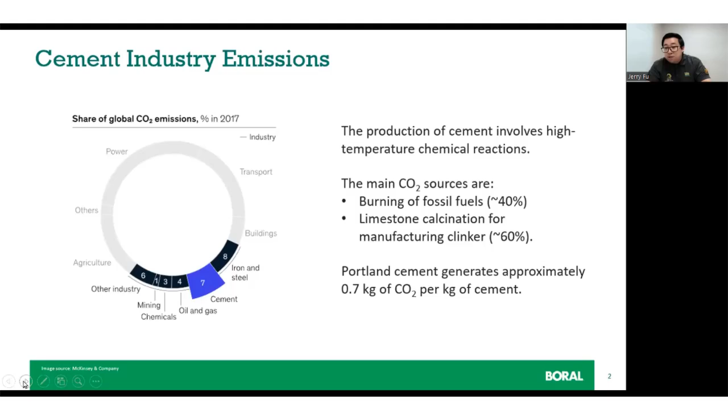Many of us have already heard that cement production is responsible for about 7% of global anthropogenic carbon emissions. More than half of these emissions are due to the release of CO2 upon the thermal decomposition of the raw material we use, limestone, during cement manufacturing. This chemical decomposition process contributes to about 60% of the total carbon emissions of the cement manufacturing process. At the same time, the fossil fuel used during manufacturing accounts for the other 40%. For every ton of manufactured grey cement, about 700 to 800 kilos of CO2 will be released.

As long as we don't change the raw material we use to make our grey cement, CO2 emissions will be unavoidable. To manufacture cement, the powder raw material is fed into the preheater tower and then the calciner. It gets heated and the calcium carbonate, the limestone in the raw material, undergoes a calcination process. The preheater consists of a series of cyclones through which the raw material is heated with hot flue gas, and the calcination of limestone takes place at around 900 degrees.

The chemical process can be described as calcium carbonate transforming into calcium oxide and CO2 gas. A portion of that calcium oxide will react with silicate materials in the calciner, especially when the raw material particle contains both lime and silicates in direct contact, resulting in the formation of belite and some aluminate and ferrite phases. The unreacted calcium oxide is denoted as free lime.

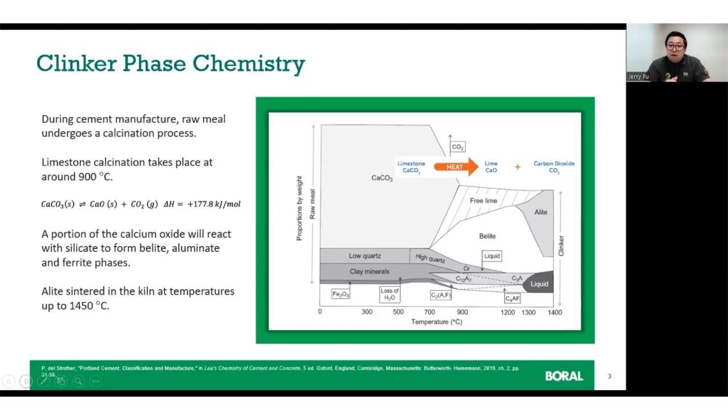The calcined raw material then enters the rotary kiln, where the main clinker phase, alite, is sintered at a temperature of 1450 degrees Celsius. This is why the manufacturing of clinker is so carbon and energy intensive.

So we need a greener way of making and using cement in this era. The industry aims to strive towards a net zero carbon emission target by the year 2050, even as industrial demand is growing and we have energy prices soaring as in today's market. For the past decades, a lot of effort has been put into developing new binders to substitute Portland cement, creating low carbon blended cement systems. Further research has been done, and continues, to investigate and develop new technologies to help mitigate operational and manufacturing carbon emissions. Technology including new approaches to limestone calcination, burning waste products to power the calciner, and pumping CO2 deep underground for permanent storage.

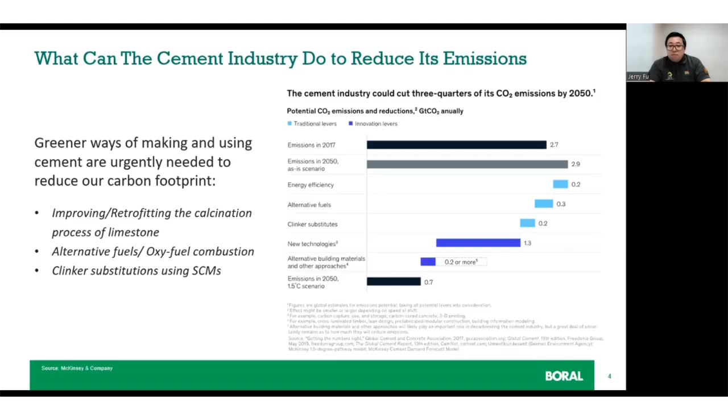Even though everyone is working incredibly hard to minimize our carbon emissions as much as possible, a considerable portion of CO2 emission generated in cement manufacturing is unavoidable. It cannot be tackled using established techniques such as alternate fuel or clinker substitution. So we must continue to develop new technology that prevents CO2 from reaching the atmosphere on a large scale by investing in long-term storage solutions in the realm of carbon capture technologies.

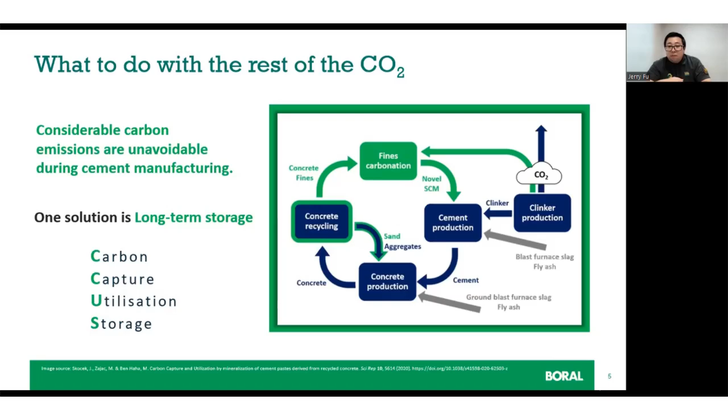One way to store CO2 in our concrete material is a process called carbonation. Recycled concrete contains alkaline minerals in the attached mortar that is ideal for carbonation, and then used as upcycled aggregates in concrete, preserving our natural resources. This process works by having cement hydrated products gradually reabsorb CO2 from the atmosphere through a physiochemical process called carbonation.

During carbonation, CO2 diffuses into the pores of cement-based materials and reacts with hydrate products such as Portlandite and CSH in the presence of an acidified pore solution. Carbonation starts at the surface of the concrete or mortar and slowly moves towards the core of the material. This process is also influenced by a range of different factors such as CO2 concentration, hydration product compositions, and exposure time. This process is a natural process.

So carbonation is a natural process, but the problem is it's a very slow occurring process. It's been reported that up to 20% of our CO2 emissions from the clinker manufacturing process can be reabsorbed by the concrete structure over its service life.

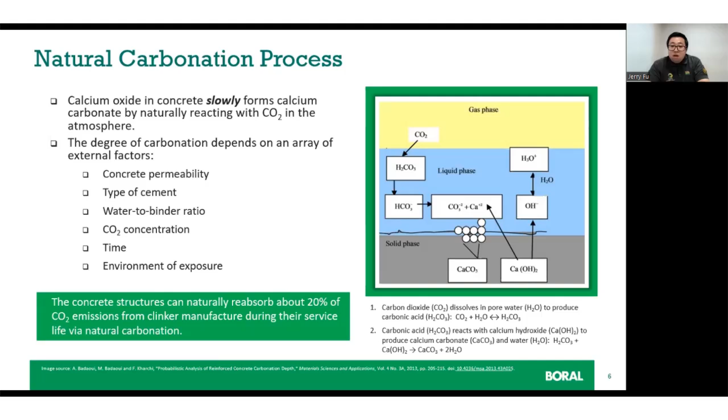There is an extensive need for aggregates in the production of concrete and other construction material due to the large number of construction projects occurring worldwide and also here in Australia. Therefore, there is a business case for encouraging recycled facilities as well as construction material manufacturers like Boral to source a part of our need for aggregates from recycled materials.

According to the 2020 National Waste Report, Australia produced about 27 megaton of C&D waste, which is about 36% of the total waste we produce. 23% of the waste was disposed either as landfill or destroyed. 76% was recycled and 0.7% was recovered for energy at the landfills.

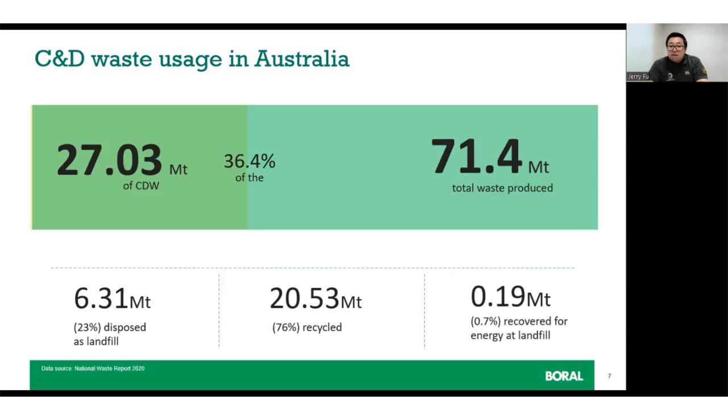Usually after demolition of old roads and buildings, the removed concrete is often considered worthless and disposed of as demolition waste. By collecting the used concrete and breaking it up, recycled concrete aggregates are created.

Recycled material used to produce construction aggregates for concrete comes from two primary sources. The first is road construction and maintenance debris, and the second is structural construction and demolition debris. For example, we're talking about demolished buildings, bridges, and sometimes roads.

Most of these recycled materials go through the process of recovery. That's your demolition, breakage, and collecting. It gets transported to a local collection point, then it gets processed. That process entails crushing, screening, separating, and stockpiling before it gets marketed as sized products for multiple uses.

The construction demolition waste could contain wood, plastic, gypsum, metal, glass, and paper, which can be removed at the plant. Other materials that can be present may be mortar paste, bitumen, bricks, tiles, and rubber. So the C&D waste is crushed and sieved into different size fractions.

The recycled aggregates produced at recycling plants may contain 65 to 70% coarse and fine aggregates, while the other 30 to 35% will be adhered old residual cement paste. The amount of cement or mortar paste is reduced as the number of crushers increases, but this usually incurs more production cost.

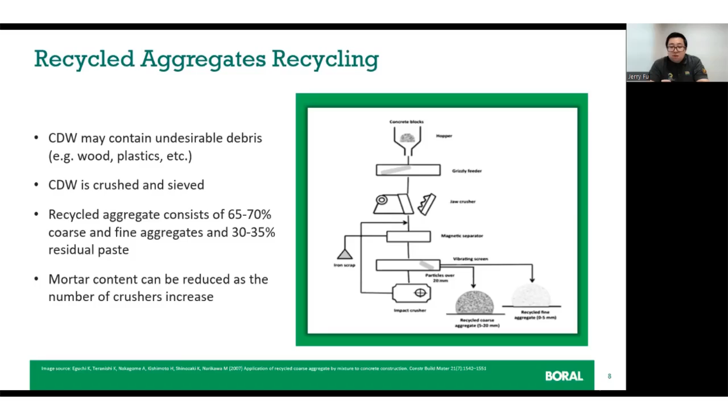Unfortunately, we can't just simply swap out the natural aggregates for recycled concrete aggregates. There are some significant differences and drawbacks regarding recycled concrete aggregates. After crushing the recycled concrete down to different aggregate sizes, the process can introduce microcracks within the residual mortar and weaken the bond between the original aggregate and the old mortar.

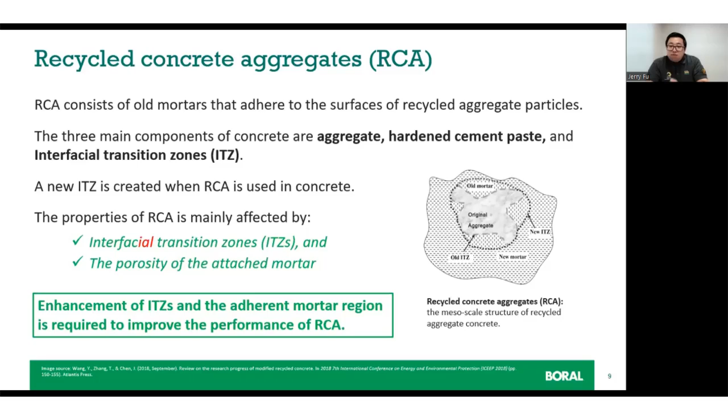The aggregate cement interfacial zone consists mainly of loose and porous hydrates. Since the difference in properties of recycled aggregates with respect to natural aggregate is mainly driven by the presence of the old attached mortar on the surface of the recycled particle, the residual mortar is responsible for the lower specific gravity, high absorption, and low abrasion resistance of these recycled aggregates when compared to natural aggregates.

These residual adhered mortar on aggregate is a main factor affecting properties such as density, porosity, and water absorption of recycled aggregates. The density of these recycled aggregates is generally lower than natural aggregates. This is due to the adhered mortar that is less dense than the underlying natural aggregate. The variation in density can depend on the specific aggregate in question.

The adhered mortar can be lightweight compared to aggregates of the same volume, which causes a decrease in product density. The residual mortar on the recycled aggregate has greater porosity. This allows the aggregate to hold more water in its pores than natural aggregate. The lower density and high porosity can lead to a reduction in the durability of the final concrete product.

Literature suggests that construction demolition waste aggregate contains about 0.1 to 0.3% higher chlorides and sulfate than natural aggregates, while recycled aggregates have higher abrasion. However, on average, they are still suitable for both concrete use and roads.

Another thing literature has suggested is that recycled aggregates have approximately 50% lower crushing values when compared to the natural aggregates we've been using. But all the literature has suggested that recycled aggregates are suitable to be used as non-structural aggregate, or suitable for minor structural elements.

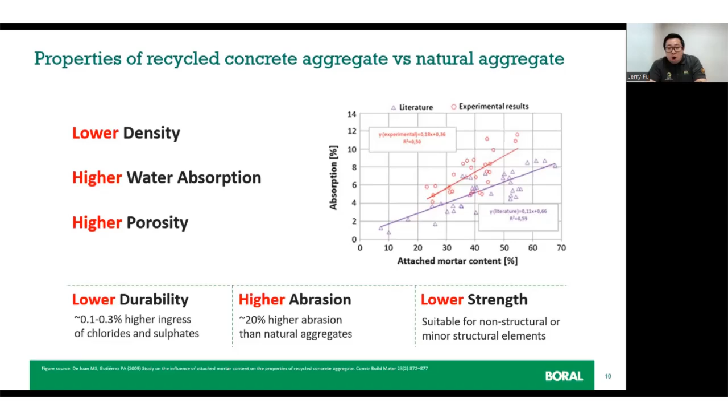Since the surface of the recycled aggregate has a large amount of aged cement slurry attached, this will increase the number of pores and cracks, resulting in lower workability and lower mechanical properties of the recycled concrete compared with natural concrete. So, for example, the higher water absorption of aggregates leads to reduced workability of concrete, thus making concrete difficult to be pumped.

Compressive strength decreases as the content of recyclable aggregates increases. This is for both coarse and fine aggregates. Therefore, a good mix design and preparation of these aggregates needs to be maintained to produce high quality concrete.

As we have mentioned, recycled aggregates have lower density and high porosity. These can lead to faster ion ingression. The high porosity of both the fine and coarse recycled aggregates allows gases to permeate more easily through the concrete internal matrix. So I'm going to skip the rest of these issues listed on the slides due to the time limit.

Given the subpar performance of recycled concrete aggregates, this partially depends on the historical usage and the way it was reclaimed.

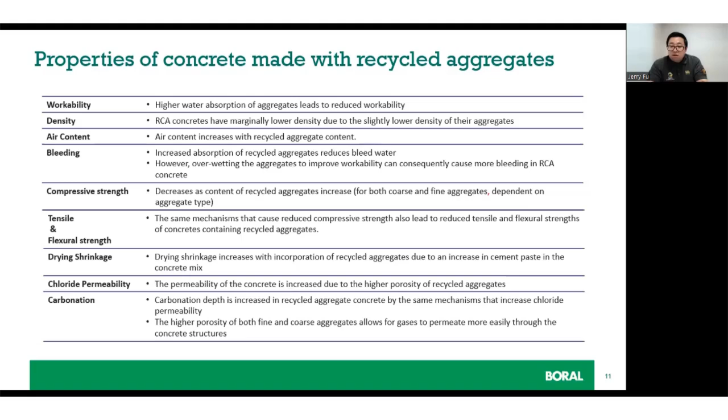Similarly, the required specifications for employing recycled aggregates are also outlined in different standards, such as the American ASTM and British BS EN standards. At the end of the day, these documents are here to provide a more comprehensive understanding of these types of waste and byproduct materials in construction applications, and provide general guidance on engineering evaluation, along with environmental issues and economic considerations.

These documents also consolidate the available materials for technical consideration and provide product specification information and tools for conventional designs.

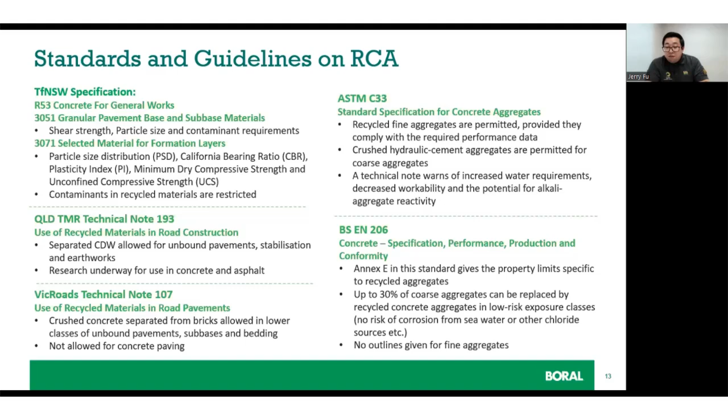So despite the performance limitations of recycled concrete aggregates, the material has been used in various construction projects worldwide in countries across Asia and Europe. Projects range from residential buildings to industrial buildings. It is nice to see recycled aggregates not used just as road base material in projects. So we know it is a viable source of construction material.

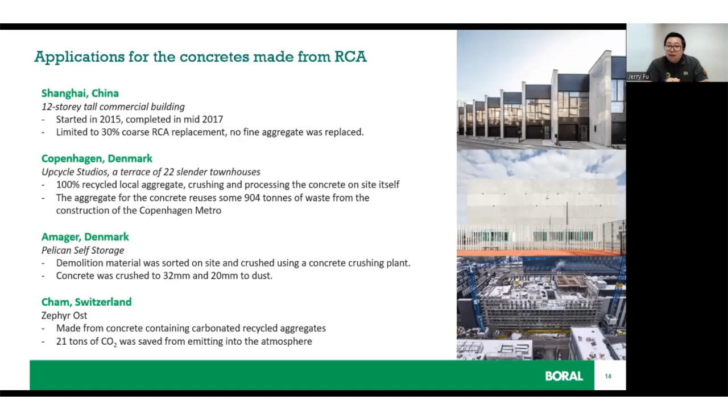It just needs more further property enhancement to unlock its full potential.

We are determined to reduce our CO2 emissions at Boral and capture CO2 from our cement plants. This helps our industry move closer to its net zero target by 2050, using a combination of decarbonisation techniques such as calcium looping or post-combustion technology at existing cement plants for carbon capture. We need to prioritise on-site CO2 utilisation before moving to underground storage, afforestation, or passing it on to our downstream customers.

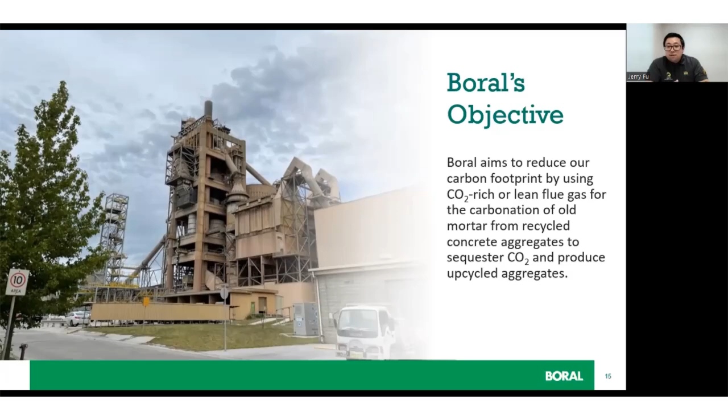One method is to utilize a CO2-rich or lean flue gas to accelerate the carbonation of recycled concrete aggregates, to sequester the CO2 and improve the performance of our recycled aggregates, overcoming the inherent shortcoming mentioned earlier in this presentation.

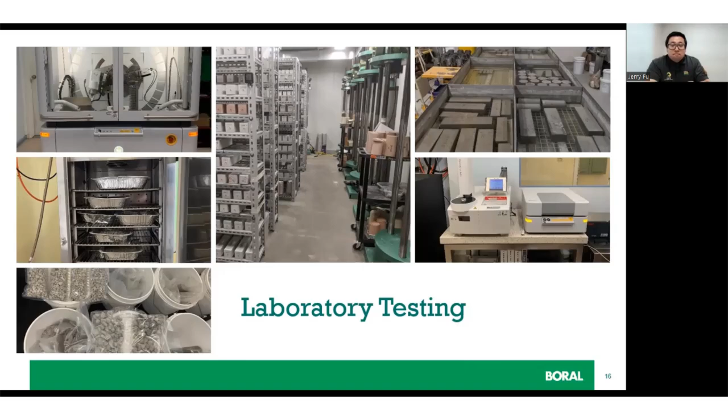It all started with small-scale laboratory tests at Boral and the lab at UTS. We are continuing these tests on our carbonated concrete recycled aggregates to assess their strength and durability performance compared to traditional GP cement mix designs.

We're still running ongoing experiments and trials in our labs to optimize the ideal condition for our recycled material. We use thermogravimetric analysis and X-ray diffraction to perform the initial analytical analysis to see the effectiveness of the carbonation reaction and compare rates of carbonation reactions.

We use our in-house carbonated recycled aggregates to conduct concrete trials to investigate the performance of our products at various natural aggregate replacement levels. So far, our preliminary results have shown to be in alignment with reported results from the literature.

We're still doing more experiments, working to optimize the carbonation parameters further to maximize the CO2 uptake of the recycled concrete aggregates, to help us push the limit of replacement boundaries.

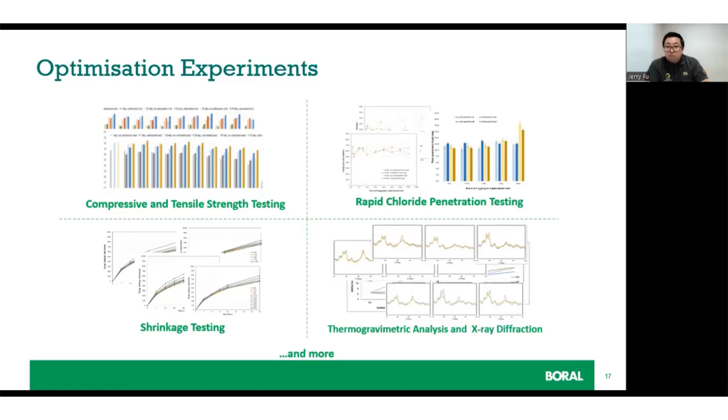This project is a collaboration between academia and industry. University of Technology Sydney provides a crucial role in providing technical expert support. The federal government provides funding to Boral and UTS through the Carbon Capture Use and Storage Development Fund.

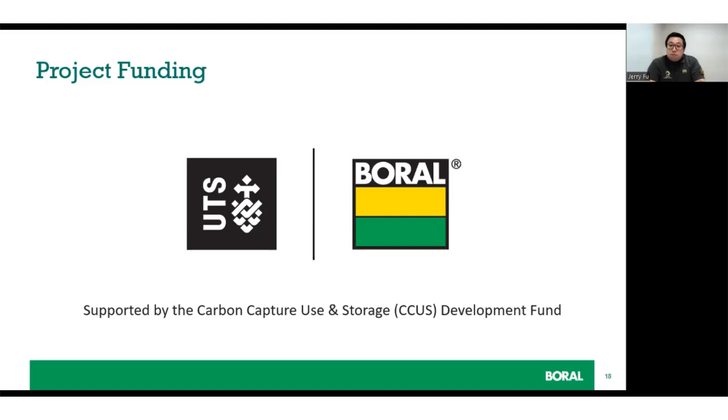The support allowed us to demonstrate the viability of this process by building a pilot plant at Berrima Works and utilizing the upcycled products to perform concrete trials.

The upcoming objective is to complete a pilot trial and the construction of a pilot plant by the end of the second quarter of 2023, and start bulk carbonation on site using the redirected flue gas from the main stack at Berrima Cement Works. We'll transfer the knowledge gathered from our laboratory tests to optimize the carbonation condition that is most effective and efficient for the pilot scale, and eventually scale up to a commercial scale.

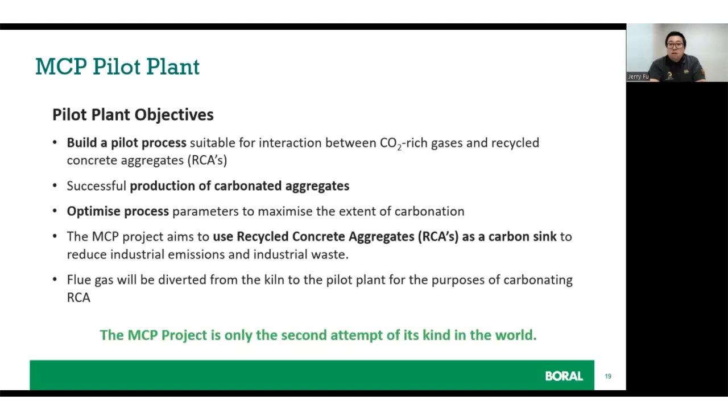To wrap up this presentation, I'd like to say how incredibly excited we all are at Boral to be carbonating locally sourced recycled waste concrete, adding value to what once was an industrial waste product that would go straight into landfill. Like everyone else, we are working very hard to achieve our target emission reduction goals and are all doing what we can to contribute.

This project is only the second attempt of its kind in the world. At Boral, we are very proud to be the first to carbonate using redirected flue gas in Australia. We are very excited to start permanently locking away some of our CO2 emissions.

So the agenda today: I'll talk about the purpose of alternative binders, then mention readily available binders versus potential binders. I'll also give a brief overview of Cement Australia's carbon roadmap, and then answer whether we really need alternative binders. I'll also talk about the future of cement manufacture, and close off with a summary.

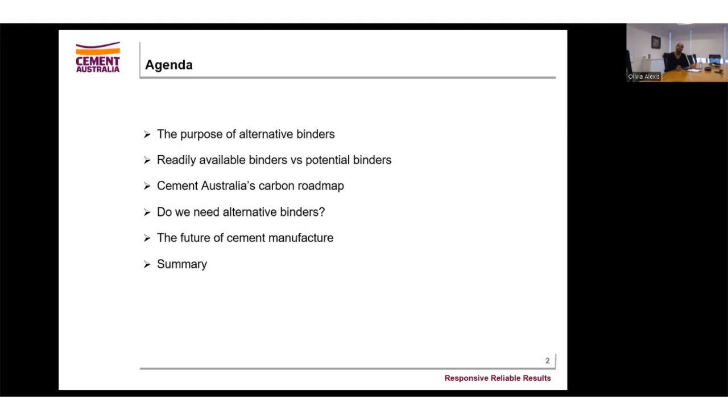So what is the purpose of alternative binders? How did we even get to this point where we are investigating alternative binders? For the last decade, if not more, we've been using conventional supplementary cementitious materials, SCM, such as fly ash and slag, for two main reasons.

One of them being for durability purposes. For instance, fly ash helps mitigate against alkali silica reaction, ASR, but we've also implemented fly ash and slag into concrete mixes to reduce the embodied carbon in concrete.

That said, we're not always going to have fly ash and we're not always going to have slag. If we take slag, for instance, when we look at the freight and the complexities of logistics, or the increase in cost of materials, it's becoming quite scarce for us to actually attain slag and import it into Australia. We're going to get to a point where we won't be able to use slag in our mixes because of these limitations.

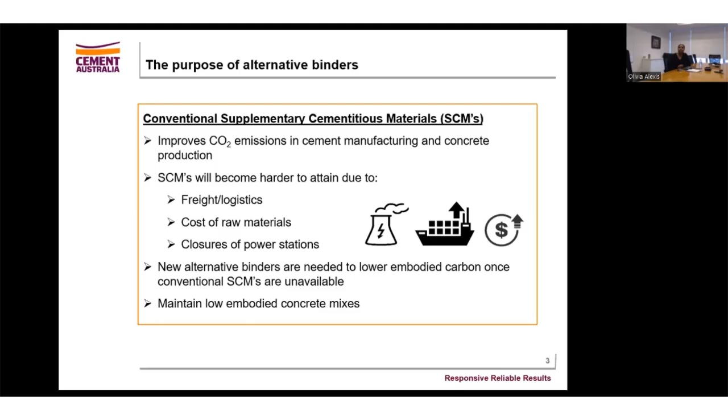Or if we look at fly ash, the closure of power stations - say Eraring moving their closure date to the next 5 years - means we won't always have the virgin fly ash we currently use in concrete to reduce our carbon emissions. So we'll need substitutes, and that's when alternative binders will come about in order to maintain low carbon concrete mixes.

So just a few examples of some alternative binders. I've named a few, but there are still a lot being developed that I haven't mentioned. Some of these are dam ash, lithium byproducts - the waste of the lithium industry, recycled concrete, calcined clay, which I believe a lot of people have heard of, volcanic ash, and red mud, which is the waste of the aluminium industry.

So the way in which alternative binders will be prioritized - I've named a few. If we look specifically at dam ash versus calcined clay, you can compare the two and say dam ash will be a more viable alternative binder. For one reason in particular: it's a readily available binder, and it has low energy requirements to process it when comparing it to calcined clay.

To process calcined clay, there's a significant amount of investment cost, and it wouldn't necessarily uphold that circular economy when comparing it to dam ash, whereby the material is just in the dams, or for instance looking at red mud, whereby you're using a waste material and recycling that. So that is what upholding a circular economy is.

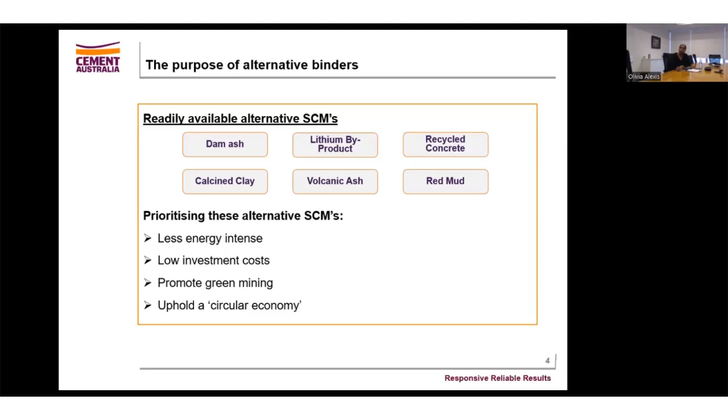If we look specifically more into a readily available binder such as dam ash, I've considered it to be readily available for one particular reason: the material is there in the ground and can easily be reclaimed or processed at a very low investment cost. The material basically needs to be taken from the ground, dried, and milled.

Just a bit of background on dam ash: there is an extensive amount of fly ash and bottom ash in dams alongside a lot of power stations. Power stations for years have been pumping bottom ash and fly ash into dams for different reasons. Some of these reasons could be high LOI that doesn't meet requirements, or simply a lack of space.

For some of the power stations that are currently closed, those dam ashes have actually been capped over. Some have just had vegetation grow over them, but the material is still good and can still be used. In some applications the depth is unknown and the quality may vary, but overall I still believe dam ash would be a more viable alternative binder.

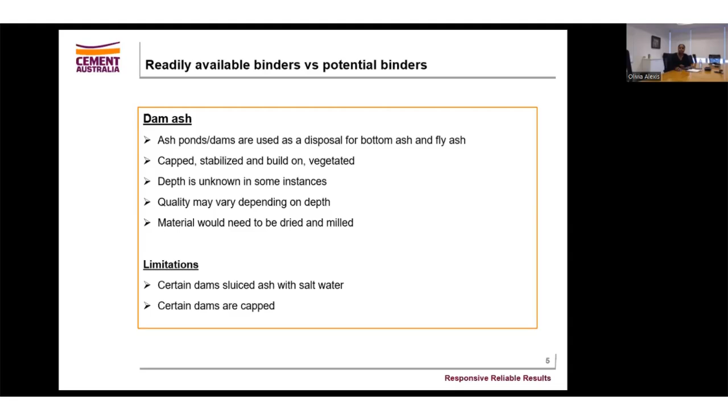Another limitation that I already mentioned was certain dams have been capped. So these are just a few power stations, well, all the power stations in Queensland, and I've put a few pictures up just to show how large these dams are and how much material, how much fly ash, how much bottom ash is in these dams.

So currently in Queensland, the power stations that we have are Gladstone, Tarong, Swanbank, which is currently closed, Kogan Creek, Stanwell, Millmerran, and Callide.

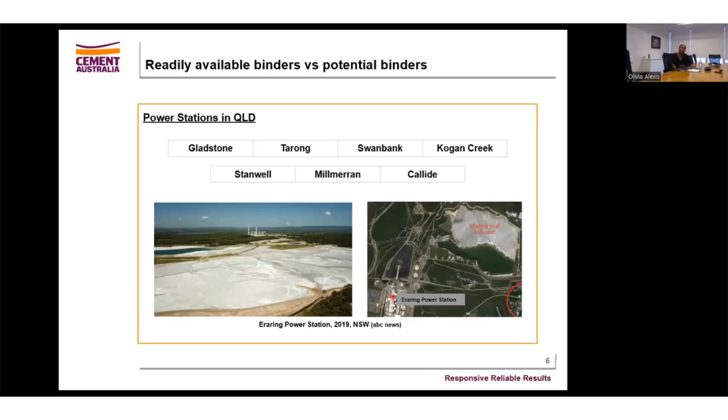So if you look in this picture, it really does emphasize that a material like dam ash is readily available because the material is right there and it needs minimal processing. When we're comparing something like dam ash to, say, calcined clay, which needs a significant amount of processing.

This is why I've considered calcined clay as a potential binder. It doesn't mean that it can't be used as an SCM, it just means that it needs more investment and more processing in order for it to be used as an SCM.

So just a bit of background on calcined clay. There is an extensive amount of clay deposits across the world, and that could be kaolin, could be MMT, serpentinite. A lot of the work around calcined clay has been focused more on kaolin, mainly because research and trial work has shown that this is a more viable clay material to use compared to some other materials, but there's still a lot of research out there being investigated around materials such as smectite.

However, the chemical mineralogy of a specific clay, whether it's kaolin or smectite, really does determine whether or not, or how much, it is pozzolanic, how reactive it is when it comes to being a pozzolan.

One particular application of calcined clay is LC3 cement. For those who don't know what LC3 cement is, it is a product that is currently being developed or investigated. So it's not yet a product, but it's something being investigated in Europe. It is a limestone, clinker, and calcined clay cement. So this is one possible application that calcined clay could be used in.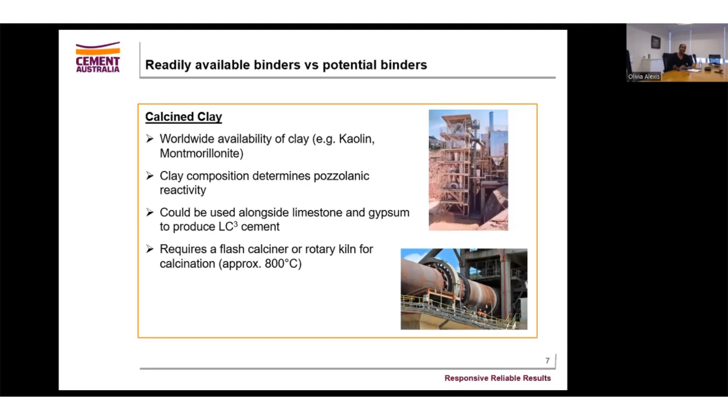So it kind of leads on to the limitations of calcined clay. I've already touched on the amount of cost and the space that would be needed in order to process clay as a means of producing calcined clay. But I really need to emphasize the lack of space, because currently in Australia, the few kilns that we do have are already being used for the manufacturing of clinker.

Some may question, why can't we alternate between the two, between manufacturing clinker and then producing calcined clay? But it's two different animals, and you can't alternate between the two. You would have to invest in a new rotary kiln in order to calcine clay and produce calcined clay in bulk, which would be quite expensive.

Another limitation is color. As many of you may or may not know, clay, if we look specifically at kaolin, is very rich in iron. And so during the calcination period, you will see that there is a change in color in the clay, and it becomes a nice warm red. So this could be a limitation when it comes to using it in concrete.

However, there are methods like monitoring the cooling, or other methods, that could be used as a means of reducing the redness in concrete.

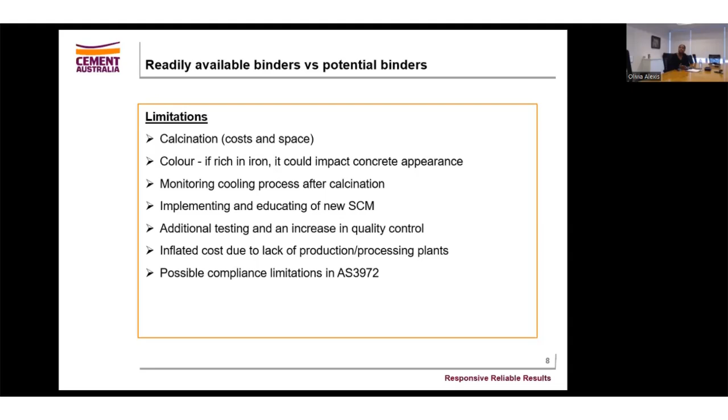So currently we have a pozzolanic standard for manufactured pozzolans, which is AS 3582 Part 4. And right now it's not mentioned in the cement standard. So this is a current limitation, but that's not to say that in the near future it will be changed to mention the new manufactured pozzolan standard.

So now that we understand what alternative binders are, the purpose of them, and some examples, this is just an overview of Cement Australia's carbon roadmap. I understand that all industries and companies have their own goals and objectives that they're moving towards in reducing their embodied carbon before 2030 or even 2050.

If we look at this carbon roadmap, we believe that we'll have fly ash and slag up into 2040, going off the closure dates of power stations. We might have lithium byproducts that kick in after 2025, more Western Australia centric, and as that comes online it should assist with elongating the lifespan of slag. Then we'll probably have some readily available binders such as dam ash that could come online just before 2035.

And then most importantly for Cement Australia, we have green methanol carbon capture, which I will talk about in more detail later in this presentation. That will be a really important period for us. In fact, it will be, and is, the long-term solution to low carbon concrete, and we'll be able to reduce embodied carbon when it comes to cement manufacturing to nearly zero.

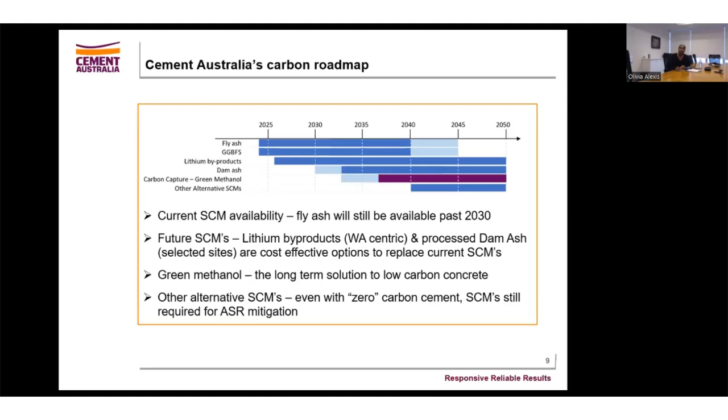So the question is, when then will we use other alternative SCMs? They may kickstart in 2040, as we would be able to produce a cement of zero embodied carbon. We'll still need alternative SCMs for durability purposes, such as ASR mitigation or other reasons. But the question still holds: do we need alternative binders? Should we still look at alternative binders?

So this is just a typical kind of breakdown of a concrete mix. We have GP cement, general purpose cement, we have coarse and fine aggregates, and we have our conventional SCMs such as fly ash. As you can see in this pie chart, GP cement is approximately 80% of the embodied carbon in the constituent of raw materials, which is very significant.

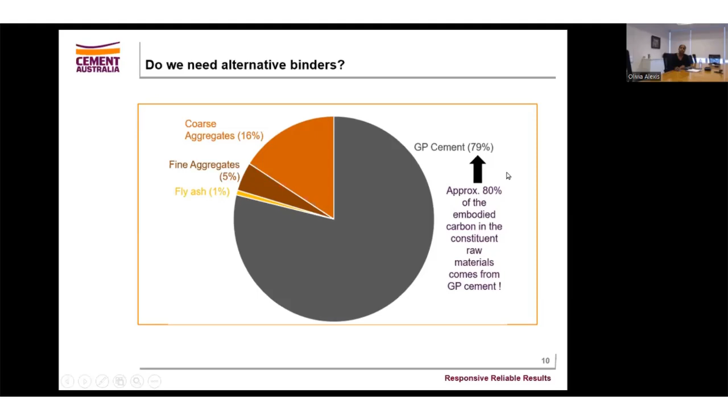So if we look specifically at numbers, GP cement, when it comes to embodied carbon per ton of CO2 emitted per ton, is approximately, and this is just a generic number, 0.820. When looking at fly ash and slag, fly ash is 0.027 and slag is 0.143. So they are significantly low when compared to GP cement. This was the reason why fly ash and slag were introduced into concrete, to really reduce this GP cement content number.

However, when we no longer have fly ash and slag, we'll need other substitutes that will ensure this GP component of 0.82 remains low in concrete. However, when it comes to Cement Australia, as we'll have our green methanol coming on board, this 0.82 will actually reduce to zero or close to zero. And then the question will be, will we even need to have a high percentage of alternative binders in concrete mix designs?

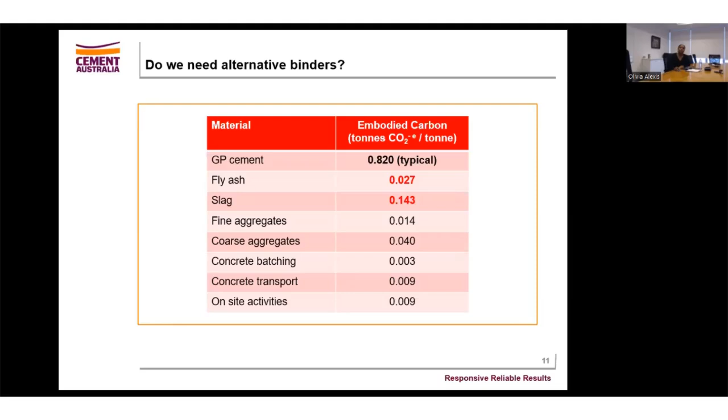So just to explain what this green methanol that I've mentioned a number of times in this presentation is: Cement Australia has partnered with Mitsubishi Gas Chemical Company to make green methanol. So just a bit of background on the process of green methanol.

So the first stage of this process is electrolysis. Basically, through the use of renewable energy, say solar energy, an electrical charge is passed through water, which separates the hydrogen and the oxygen. That process is called electrolysis. And because we use renewable energy, the hydrogen would be considered green hydrogen.

So the second phase of this process is using the oxygen in our kiln instead of the air that we currently use. The oxygen will be used to enrich the burning environment of our kiln. Then we'll be able to capture a high purity of CO2, and we'll provide that to Mitsubishi.

So with the use of green hydrogen and CO2, that then will produce methanol. And with the use of green hydrogen, it's actually now green methanol. And for those who don't know, methanol is a building block for many things, whether it's pharmaceutical drugs, or a number of other things.

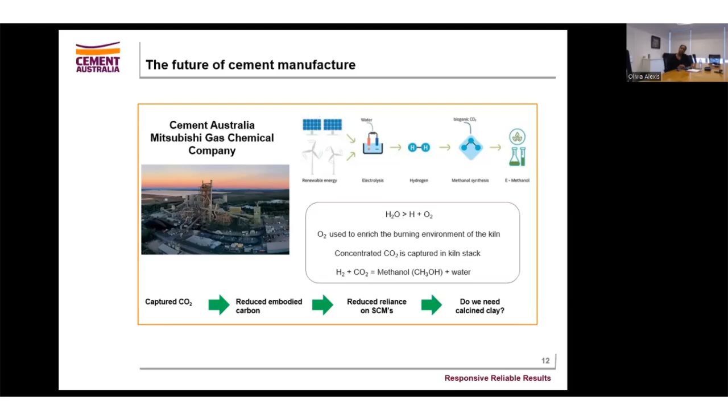So just in summary, driving embodied carbon contents downward in concrete mixes continues to be the primary focus of current and future R&D. Alternative binders could be used to replace conventional SCMs such as fly ash and slag, and reducing embodied carbon in cement manufacturing can be accomplished through the production of green methanol. Thank you for listening to my presentation.